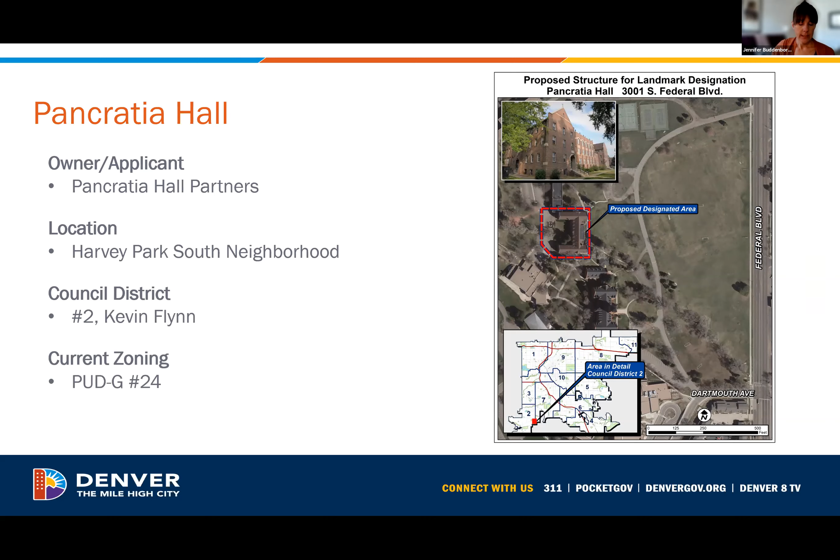The designation process is community driven, and applications can be submitted by a variety of persons that you can see here on the screen. For this property, the owner submitted the designation application. The applicant is owner Pancratia Hall Partners, represented here today by Jim Hartman, who will be giving the applicant presentation. Pancratia Hall is located in the Harvey Park South neighborhood and Council District number 2, which is Councilman Kevin Flynn. Its zoning is customized and resulted from the implementation of the Loretto Heights Small Area Plan. PUD-G number 24 includes guidance on the treatment of Pancratia Hall and the other historic structures and open spaces that are being preserved for future use. This structure is near the end of a rehabilitation that is providing an adaptive use of the structure as affordable housing. The project is a state and federal rehabilitation tax credit project.

A property must meet the following criteria for historic designation: it has to be more than 30 years old or of exceptional importance, meet at least 3 out of 10 significance criteria, maintain integrity, and be considered by the Landmark Preservation Commission for relation to historic context or theme. We'll go through all of those now.

This one meets a lot of significance criteria. The structure, built in 1930, is more than 30 years old. It meets 5 significance criteria, shown highlighted on screen, which is 50% of the significance criteria as a whole: B, C, D, F, and J. It has direct and substantial association with a recognized person or persons who had influence on society.

It embodies the distinctive visible characteristics of an architectural style or type. It is a significant example of the work of a recognized architect or master builder. It represents an established and familiar feature of the neighborhood, community, or contemporary city due to its prominent location or physical characteristics. And lastly, it is associated with social movements, institutions, or patterns of growth or change that contributed significantly to the culture of the neighborhood, community, city, state, or nation. I'll go through each of these significance criteria in detail now.

Pancratia Hall has direct and substantial association with the Sisters of Loretto and Mother Mary Pancratia, who looks a little scary here, but I understand from history she was a very lovely woman. She was born Mary Lucinda Bonfils in 1851, for whom the building was named in memoriam. Both the group and person had influence on Denver society as an arm of the Roman Catholic Church focused on education, in this case, women's education.

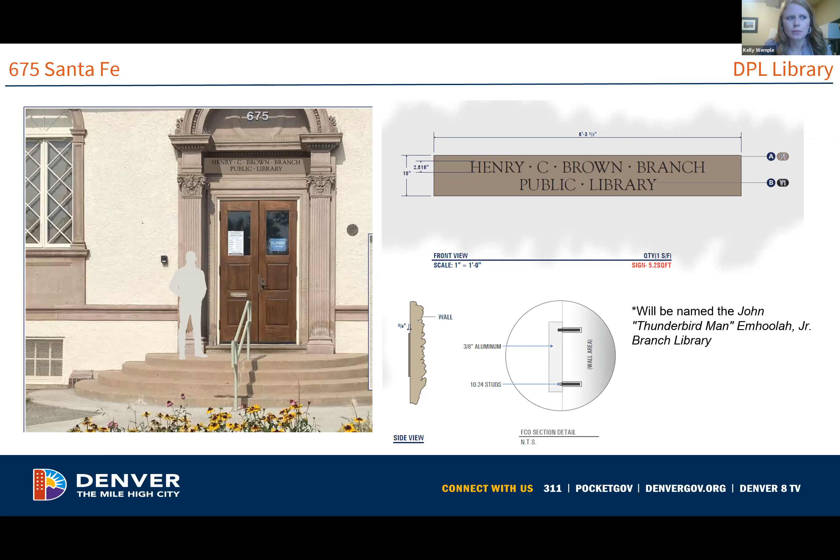So the next project up for design review is project number 2021-COA-461 at 164 Lafayette Street. Jesse, go ahead.

Hi, Jesse. Okay, can you hear me? Yes. All right, I don't know what happened because when I did my sound check earlier, everything worked fine. All right, let's get to it.

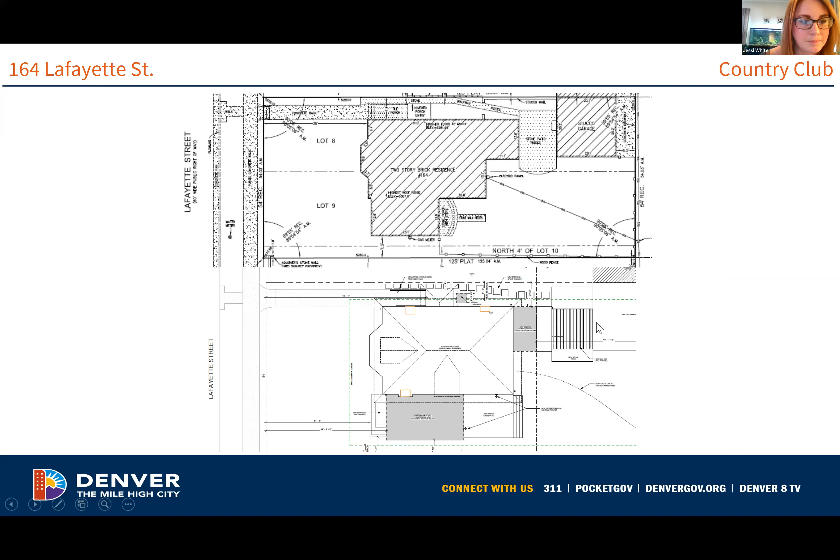So pictured here is the existing demolition plan and proposed basement level plan. Here you can see the proposal for an egress window on the front of the house on the non-historic side addition.

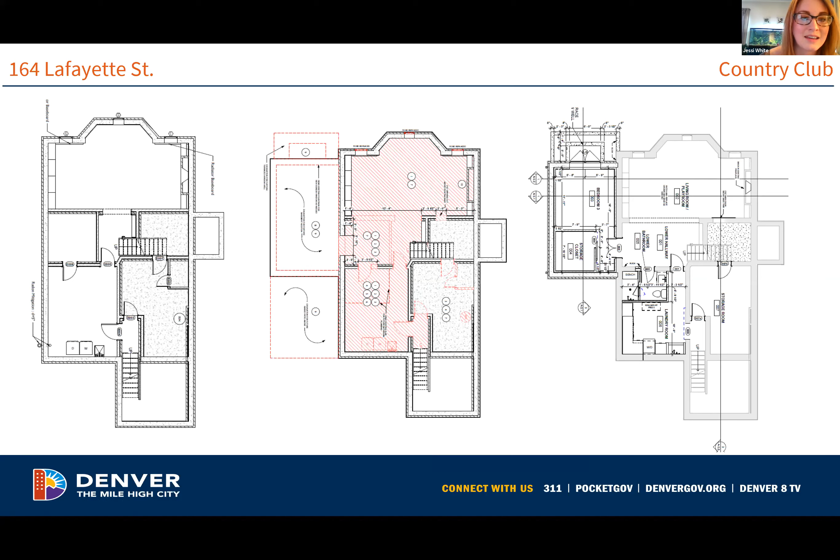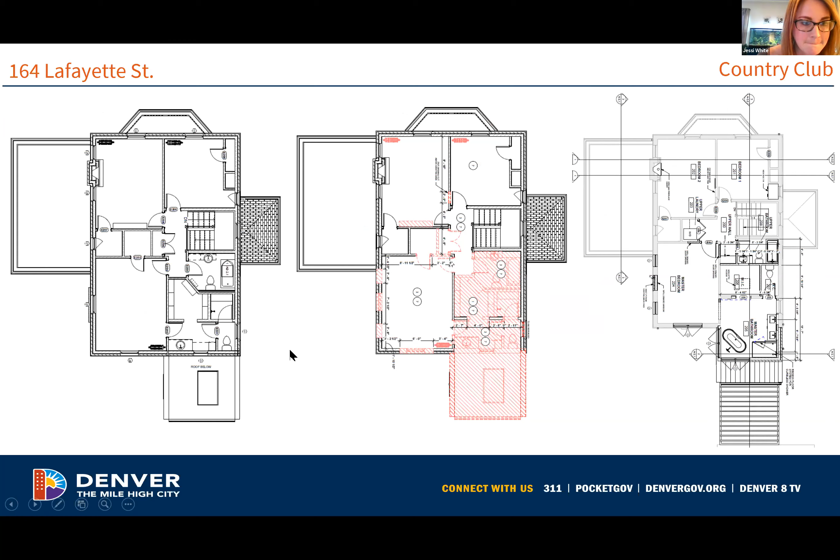Pictured here is the existing demolition and proposed plan for the main level. Give you a second to take a look at that. Moving on now, pictured here is the existing demolition and proposed upper level plan. And then finally, the existing demolition and proposed roof plan.

So in the demo plan, you can see where they're proposing to remove a rear dormer to accommodate the new rear addition. This is completely at the back of the house and would not be readily visible from public vantage points.

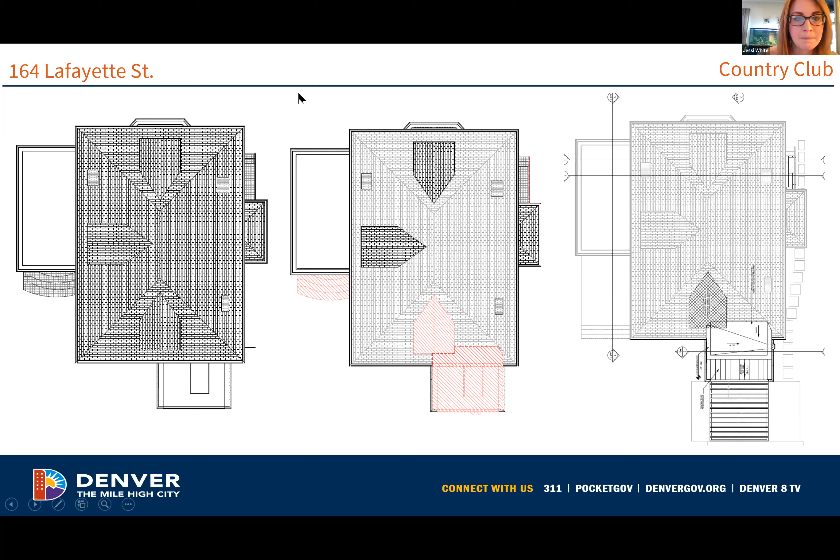Staff would like to note that the proposed egress window well will be terraced, which is atypical and makes the egress well quite large. The egress window and well will be mostly below grade and not readily visible from public vantage points, however. So if the commission is concerned with the oversized well, they may make a condition for the egress well to be a standard size. However, staff wasn't too concerned with the terracing, as it would not be as readily visible from public vantage points.

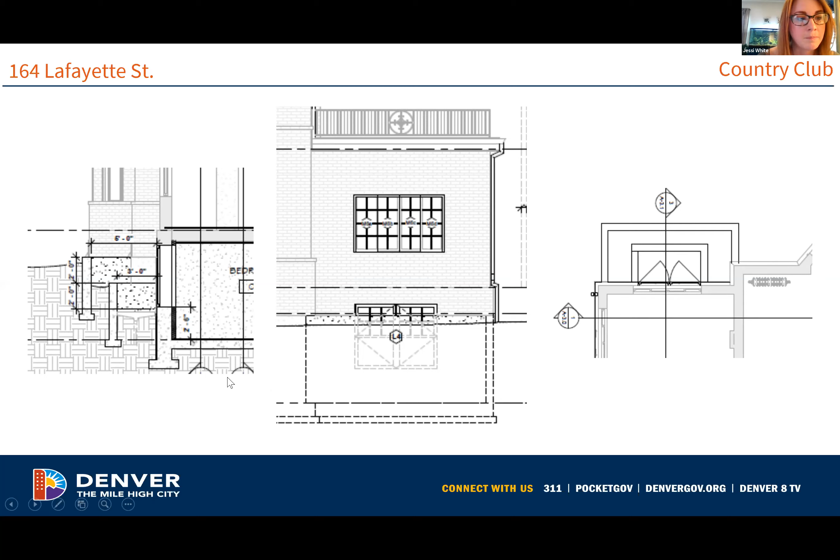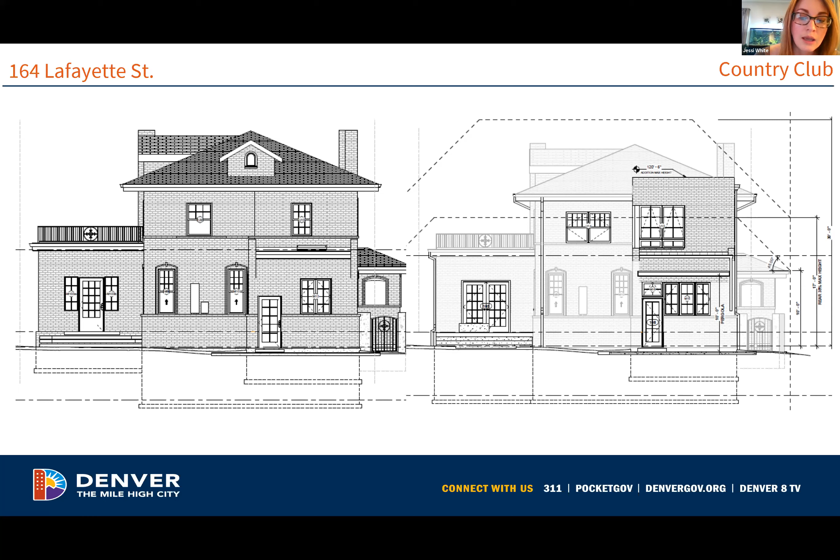The addition windows will be aluminum clad wood awning and casement style windows with a divided light pattern similar to the windows on the house. They aren't an exact match, but allow the addition to be identifiable as modern while still alluding to the divided light pattern on the rest of the house. The applicant will need to indicate in the drawings that the addition windows will be inset 2 inches in the wall per the commission's past requirements.

On top of that, the applicant is proposing to construct 2 new rear patios, installing stepping stones, all pictured here. The stepping stones will be behind the entryway shown in the picture on the left. They will add a raised patio measuring 15 feet 7 inches by 12 feet 8 1/2 inches, located on the northeast corner of the house behind the non-historic side addition. They will add another patio with a pergola, located on the northwest corner of the house behind the non-historic rear addition.

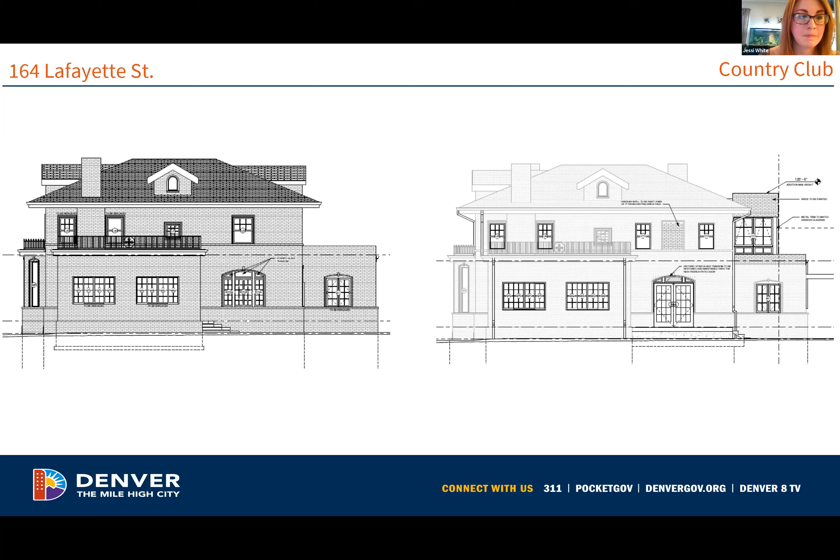So here's that historic casement window with the stained glass. Here is the historic stained glass transom window with the casements below. The applicant is proposing again to replace these casement windows with a set of French doors.

Staff felt that maybe some flexibility could be applied here, even though the lower portion is also historic. It is located behind that non-historic side addition and isn't readily visible from public vantage points. So staff felt we could provide some flexibility on the lower portion of the casement windows to convert them into French doors: one, because they won't be readily visible, and two, because the configuration will be similar to what is currently seen with those casement windows. Also, our other factor in thinking flexibility could be provided was that they are going to maintain that stained glass transom window over the top.

Finally, the applicant will be adding a new mechanical unit on the west side of the house behind the entry porch, and simple wall sconces will be added to the patio on the northeast side of the house. With the HVAC unit, staff felt that it was tucked behind that entry porch and would not be readily visible, so we are supportive of its placement there. Staff also was supportive of the exterior lights as they have a modern appearance and will be minimally visible from public vantage points.

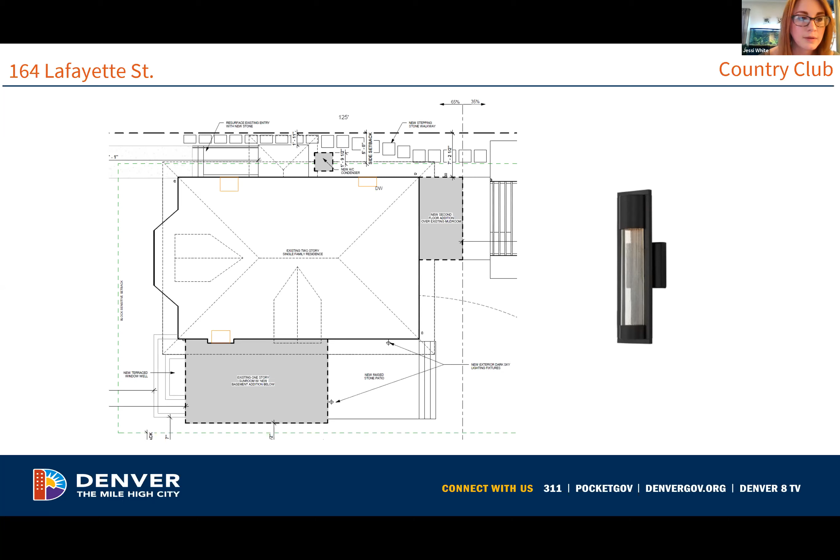Staff is recommending approval of the application, with the condition that the front door be maintained, that the front porch tile be maintained, that the addition windows be inset 2 inches, and that a spacer bar be added. So we're recommending conditional approval with those 4 conditions. If you need me to repeat them, I'm more than happy to do that. I believe I added guideline 2.20 for the porch condition.

Great. Well, thank you, Jessi. Any questions for staff? Yeah, Erica.

Yeah, you may not have the answers, Jessi, and I'm happy to ask the applicant, but do you have a sense of, with the railing at the entry porch, it's supposed to be lifted 3 inches, but I'm unclear how that's going to be achieved. Are they putting in new bases for it? I'm a little confused as to how that's supposed to be accomplished. And one other thing, I believe all the elevations are incorrectly labeled with wrong cardinal directions.

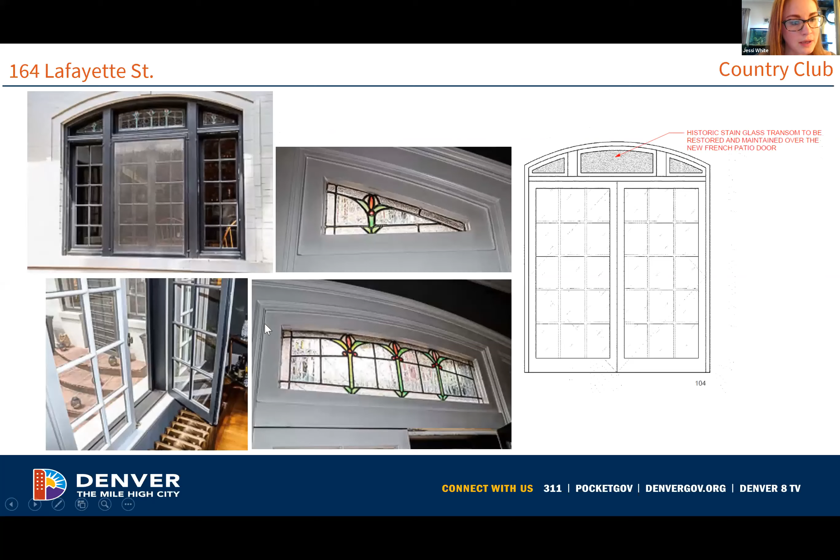So with the raised railing, let me try and zoom in on this, though I don't know if I can get it close enough. You can see in the drawings where they have it lifted, shifting it up 3 inches. There are some posts at the bottom that are kind of floating. My assumption was that they were going to attach it 3 inches higher where it meets the entry porch, but they can provide that additional detail if needed. Correcting the cardinal directions can also be added as an easy condition to this application.

Any other questions? Yeah, Ian. Hi, Jessi, I have a question. Do you know the approximate date of the addition? I do not.

All right, any other questions? No. Okay. I actually have one question, Kelly. Yeah, go ahead.

When you talk about replacing or repairing the existing door, what are your thoughts on the etching on the glass? Is that included in the repair? Do you think that is part of the original? I am of the opinion that the etched glass is not likely original. If they were to replace the glazing on that door, it would not require a permit and therefore would not require landmark review. So if they're wanting to get additional light into that area, they could easily remove that etched glass and put in a solid pane of glass, and it wouldn't even require our review.

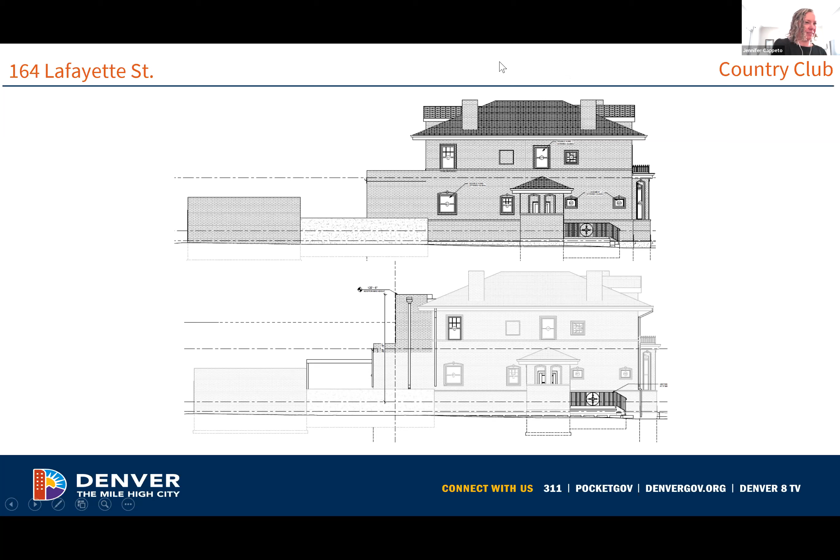All right, well thank you, Jessi, so much for your introduction. You actually covered half of the things I was going to talk about, so you helped me save a little bit of my time. As Jessi said, built in 1907, we believe this house is a traditional Denver square with a few eclectic revival details. It obviously has prairie style influence, but we also feel like it has a little bit of Italian Renaissance and classical influence as well. All right, next slide, please.

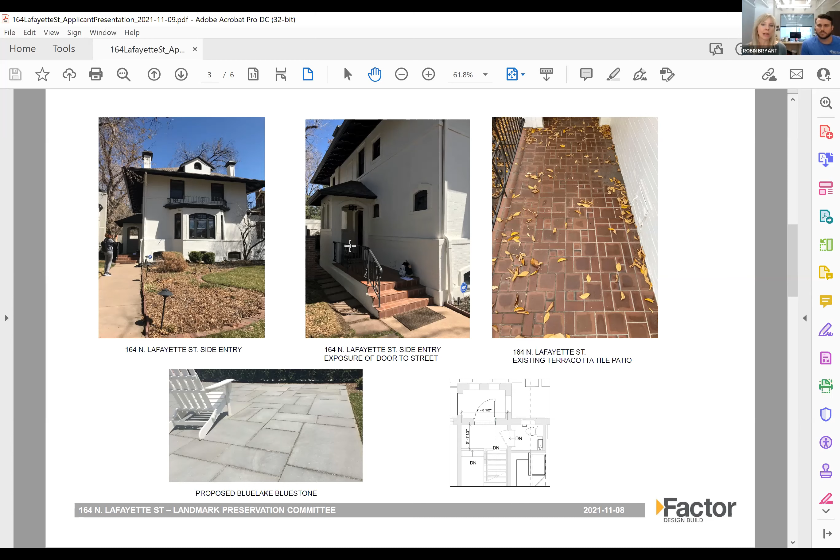One of the other things the homeowner would also be open to, knowing that bluestone is not an indigenous stone to this area, is looking at something like a Colorado buff or Colorado red sandstone in a larger ashlar pattern, if the commission finds it appropriate.

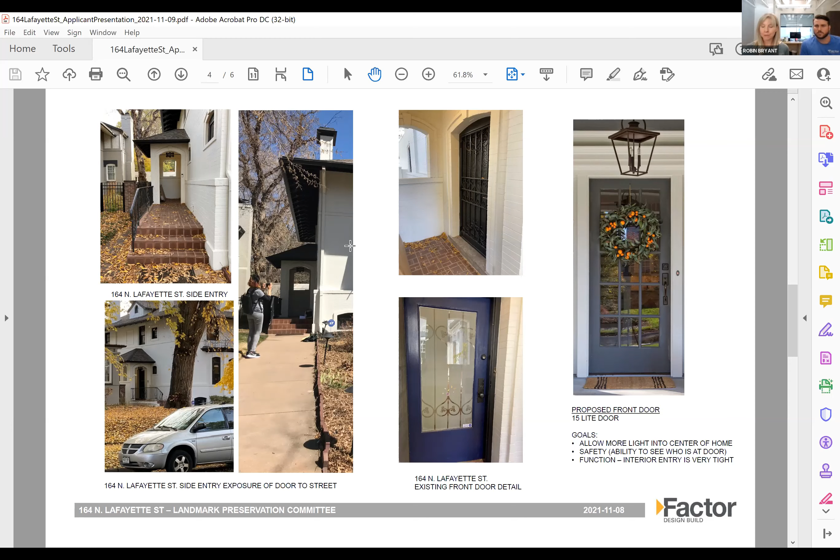Part of the reason we're proposing the change of the front door is that the homeowner would like to reverse the operation of the door to become an outswing door. If you look at the existing foyer entry, the foyer is actually on the landing of the internal staircase, so it's very narrow - only 3 feet 7 inches deep.

So that was the prompt to, one, change the door to an outswing, and two, modify the patio pavers, because if we changed the door to an outswing, the IRC would require us to raise the surface landing to only 1.5 inches below the door. That prompted the change to resurface the entry portico.

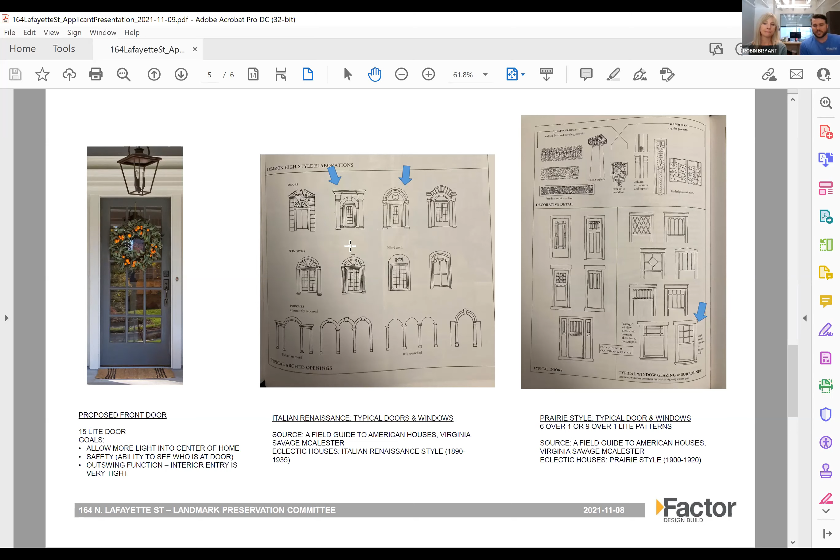Did you have anything else to add, Brian? I think the only other comment from the homeowner was her concern with having the stairs there and all the in-swing doors. She has two smaller children, so there's a bit of concern about the safety of those steps and everything around there with all those doors. That is it.

Great, thank you. Are there any questions for the applicants? Yeah, Graham. You're on mute. I even unclicked it, that's three times today. That's some kind of streak, isn't it?

The transom over the casement windows that are becoming a French door — I was curious whether those sash would be removed and if that whole frame was being reinstalled, or if that existing three-part casement window was being cut at the horizontal mullion. Just a little detail on how those new and old elements would interact with each other.

Yeah, so from my understanding we had the window evaluator come out to check if they're historic. I think three of the four separations of the stained glass are actually buckling and pushing the stained glass out into the room. So he recommended taking everything out when we do it, restoring the transom and putting that back in, then having the door go underneath with the framing at the top of the door acting as the support for that. Because somewhere there's pressure going on that's buckling the stained glass out into the room. So he was recommending taking it all out, restoring it, and then reinstalling it on top of the door.

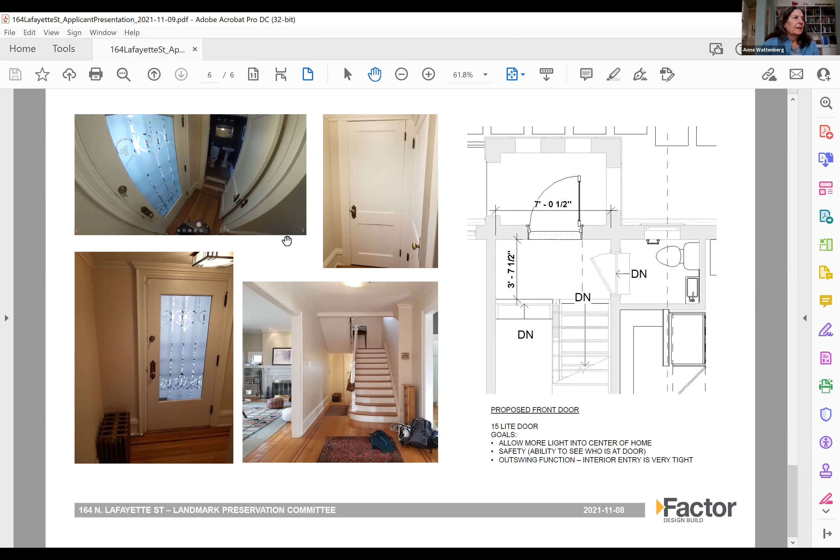I do. I'm looking at guideline 3.7, design the roof of a new addition to be compatible with the original structure and surrounding historic context. And I think this is something that we've been through before. I understand that this is at the back of the house, and often we give a great deal of leeway to that. However, I find this roof to be not compatible with the existing roof. How did everybody else feel about that? Any concerns with the addition roof? Does it bite into that prairie overhang. So it's a...

Kelly, I don't disagree with Anne that the addition itself, whether the first story addition, is contributing or historic—that second level, we heard about revival or classical detailing in the base Denver Square massing. I feel like the second floor addition has a bit of an international style to it, with strong glazing in the corner and a very square mass, which is unique but not one we talked about in the context of the rest of the historic character. So I see it being in the back and below the roof ridge as somewhat subordinate, but I don't disagree that a slightly different roof line might make that addition more subordinate.

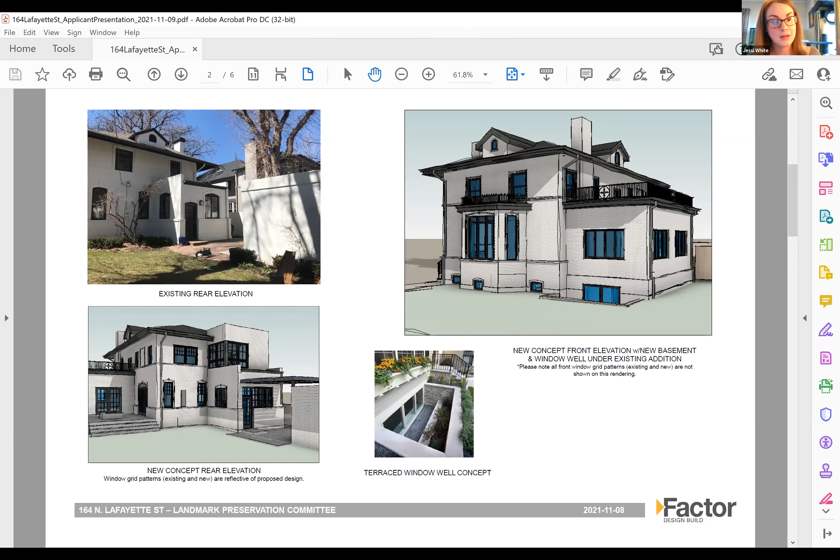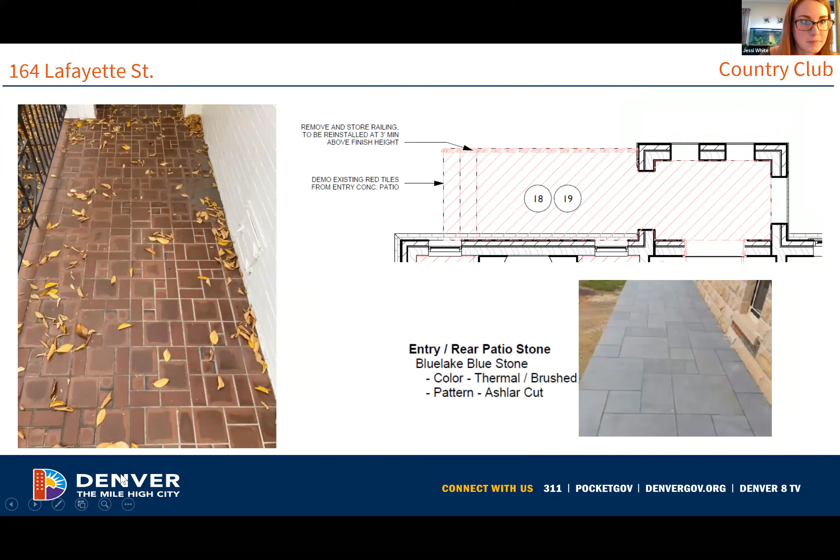Give me a second to scroll here. Seems to be lagging a little bit.

Okay, so here we have 1250 Vine Street, constructed in 1896. This is a contributing building to the Wyman Historic District. The applicant is proposing to replace 22 windows on the front, sides, and back of the house with aluminum clad wood windows. Staff would like to note that the applicant is proposing to make repairs to the existing porch on the front of the house. Just as a reminder, this does not require a landmark review. I'm just bringing it up simply because it is included in the application, and just wanted to put that reminder out there.

So here are the floor plans denoting the windows to be replaced and repaired. Teal represents the windows to be replaced. Most of the replacements are slated for the attic and second floor of the building, although the applicant is proposing to replace some windows on the back of the house at the first floor.

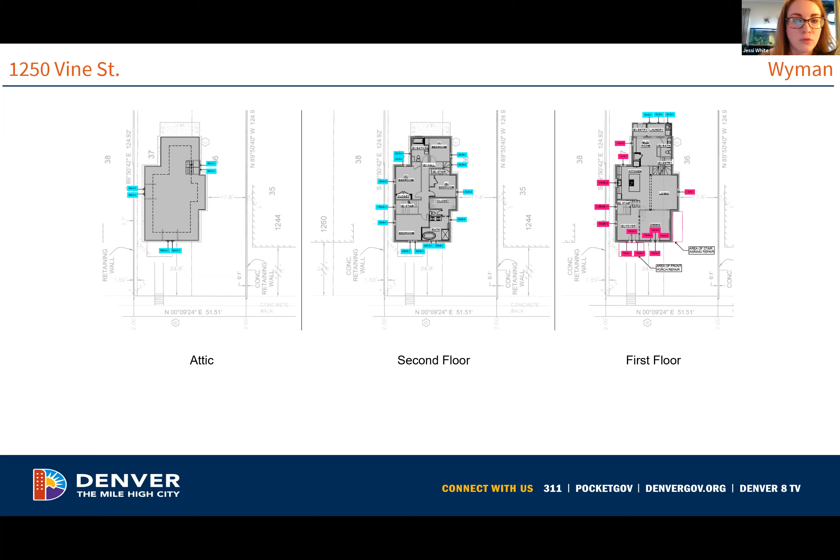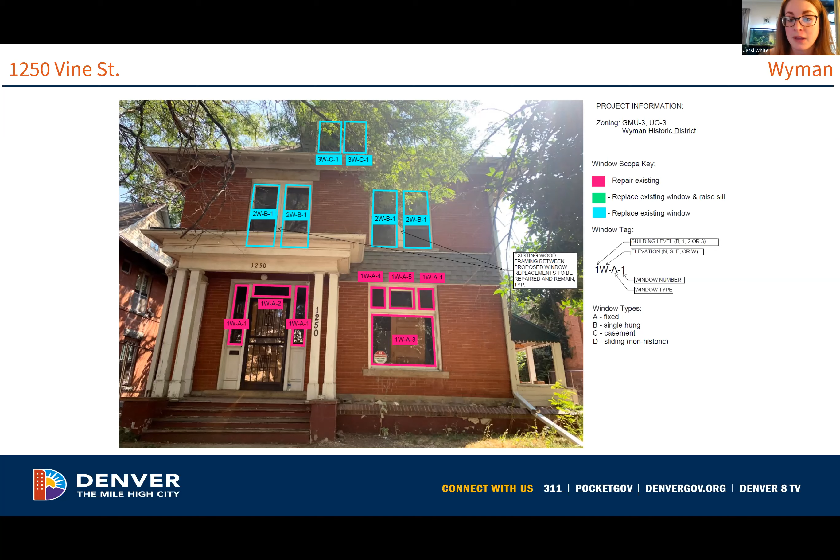So here's the west elevation. The applicant has broken their window labels down into the building level, elevation, window type, and window number. Staff would recommend that a specific window number be provided for each individual window, as there are several windows on each elevation that have the same label, and it just makes it difficult whenever you're looking at the detailed windows to remember which window is which. So on the west elevation, the applicant is proposing to replace a total of 6 windows.

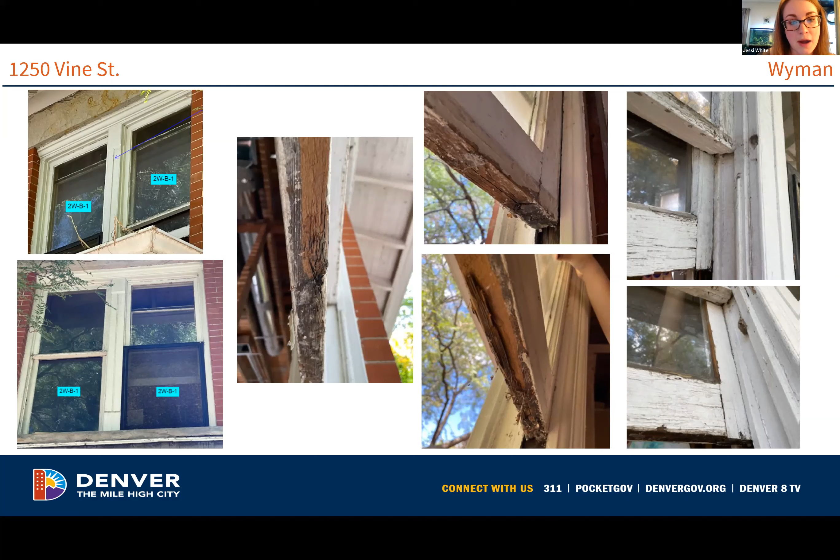Sorry, I have a cat that is in love with me right now. Generally speaking, the 4 windows labeled as 2W-B-1, staff recommend or are supportive of replacement of these windows. The images provided for each of these windows shows severe wood rot, splitting wood, especially at the lower rails, issues at the joints, especially at the lower rails. Again, here we need updated labels just so we know which window is which. But generally speaking, we felt that these windows were in a state of severe disrepair, as indicated by the photos provided for each of them.

The window labeled 3W-C-1 on page 10, pictured on the left here, shows wood rot, splitting wood, especially on the lower rail, and slipping at the joints. Staff would be supportive of replacement of this window. Window labeled 3W-C-1 on page 11, pictured on the right, shows details of the window trim and frame, but does not provide clear images of the condition of that window. So the applicant will need to provide us with additional information, photographs of the actual window to be replaced, so that we can make a clearer decision or determination as to whether or not it would be viable for replacement.

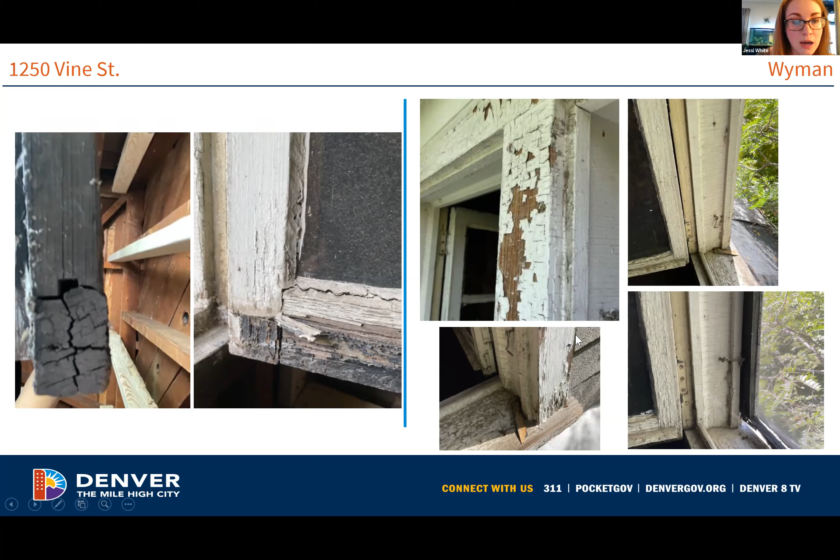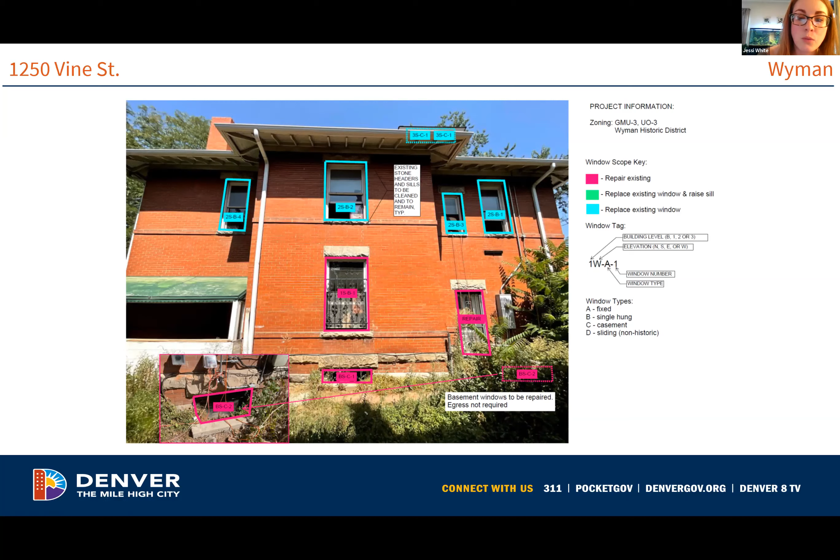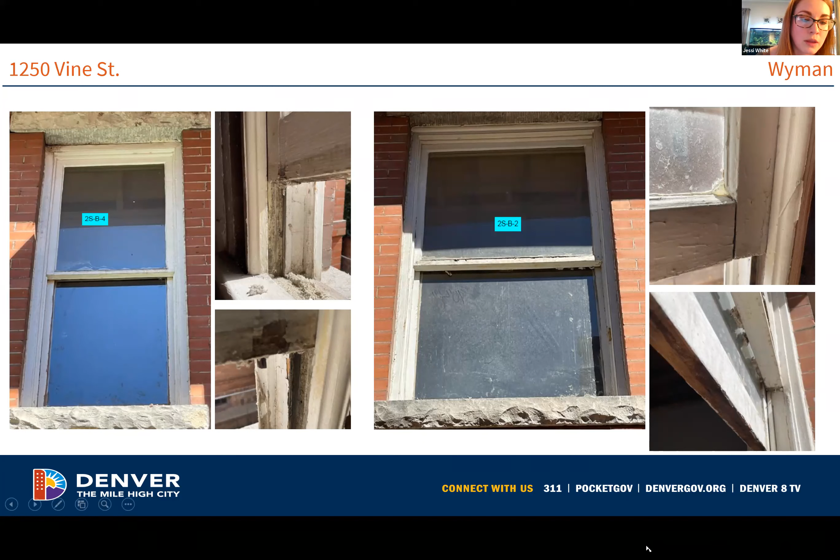So here's the south elevation. The applicant is proposing to replace 4 windows on the second floor and 2 windows at the attic floor level. Window 2S-B-4 is in good condition and could be easily repaired. Window 2S-B-2 is likewise and appears in repairable condition, with some slipping at the joints, but that again could be easily repaired. And there are some detailed photos showing the window condition. The wood looks sound and it looks like it could be easily repaired.

Oops, I'm on the wrong page.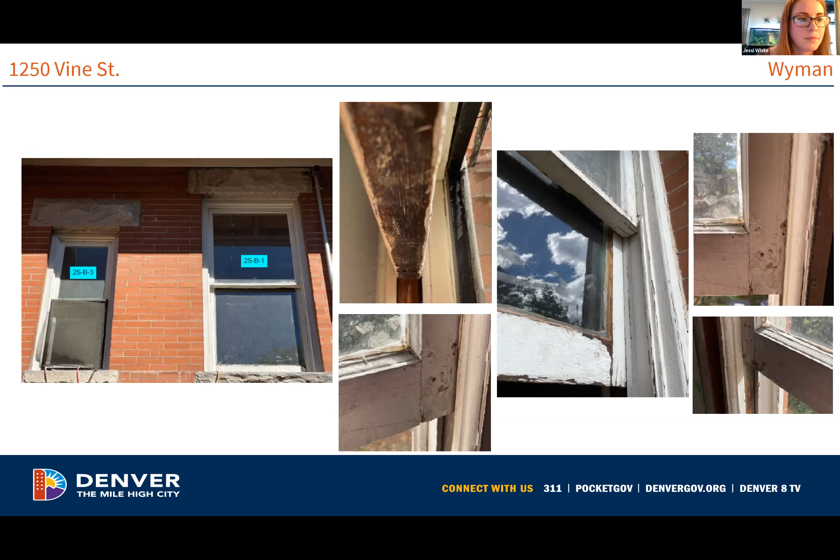Sorry, this mouse is real clicky.

This is the page showing both the double hung and casement style windows, so we're just needing some clarification and additional photos to show the window conditions more clearly. Also on this elevation, they're proposing to replace the roof on this non-historic awning, replacing the metal roof with a shingle roof in the color weatherwood.

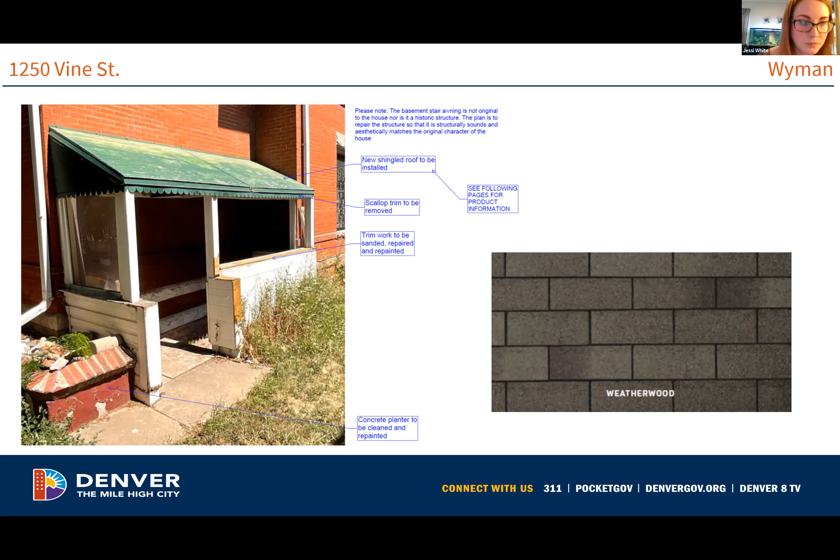Now we're going to move on to the northwest corner of the elevation. This was a tight side of the house, so they had to take it at angles. The applicant is proposing to replace two windows on the second floor and two windows at the attic floor level.

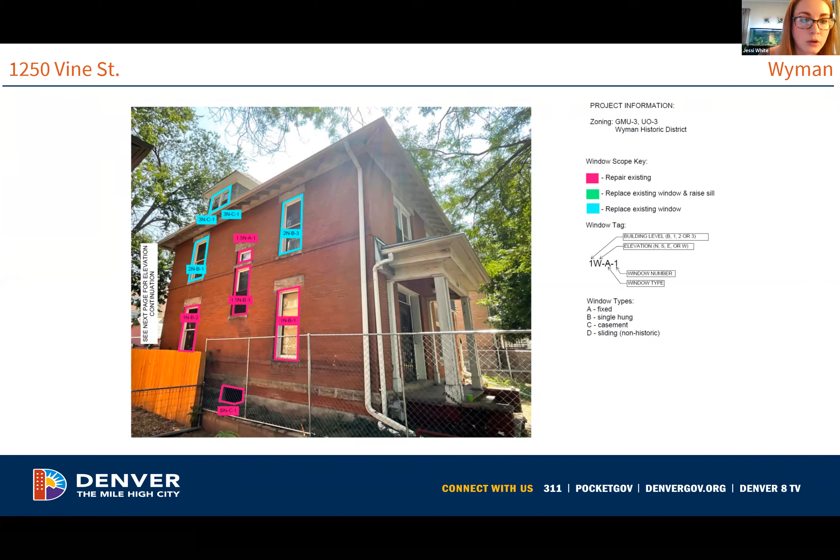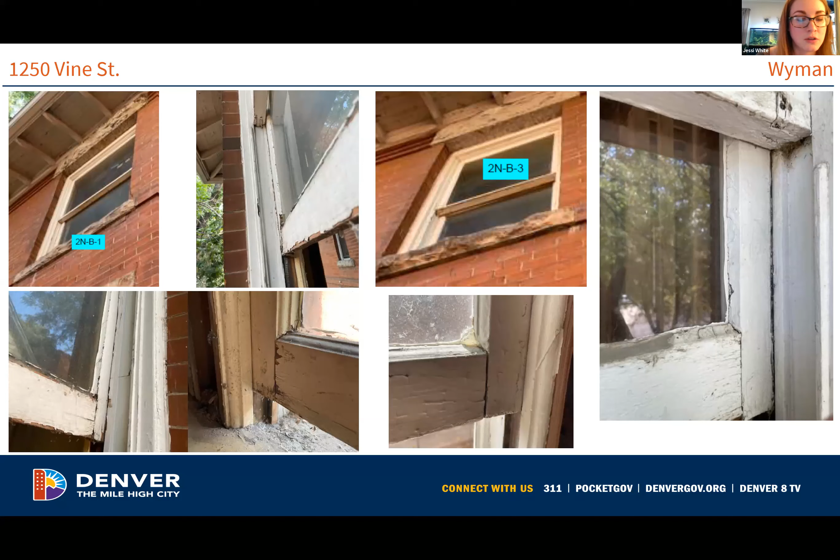Window 2N-B-1 is in sound and repairable condition. Window 2N-B-3 is in repairable condition with minor slipping at the joints. Again, those are all items that are easily repairable.

Windows 3N-C-1 are in moderately repairable condition. The wood appears mostly sound with damage to one of the stiles on the right casement window. The joints and glazing putty appear to be in bad condition, but could be easily repaired.

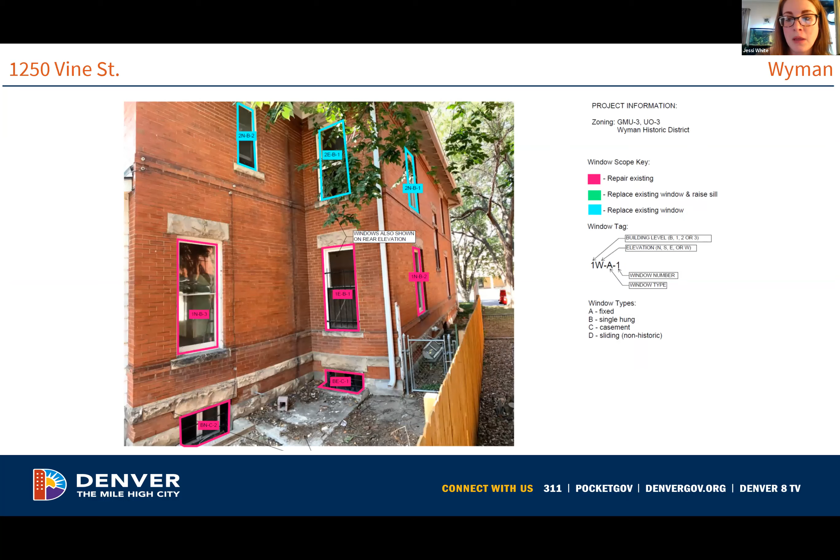Moving on to the northeast corner of that elevation, the applicant is proposing to replace two windows at the second floor.

Pictured here is window 2N-B-2. This window appears to be in sound condition, but may potentially be non-historic. The applicant will need to provide clearer images to make a final determination. It does look like the glazing has been replaced, but that doesn't necessarily mean the window is no longer historic. We don't have clear images showing the overall window, both window sashes, or the hardware to determine whether it's historic.

Finally, we'll cover the east elevation. The applicant is proposing to replace three windows at the ground floor level and one window on the second floor level.

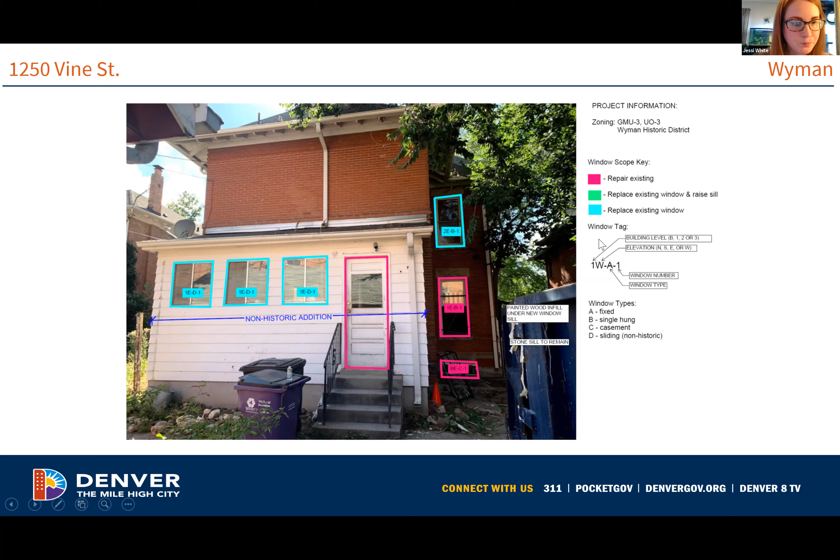Window 2E-B-1 shows signs of joint issues at the meeting rail and lower rail. Glazing putty is significantly damaged. The upper sash appears to be out of plumb. Staff would be supportive of replacement of this window.

The applicant did not provide detailed images of the three windows at the first floor, all labeled as 1E-D-1. The windows appear to be non-historic, but additional detail images would need to be provided for us to make a clear assessment, though we feel those could potentially be replaced. Landmark staff feels this application has not included sufficient information on the windows to be replaced.

Staff is recommending denial of the application, citing guidelines 2.16, 2.19, and 2.20, with comments on additional information needed that have been cited throughout this presentation and in the staff report.

Thanks, Jessi. Are there any questions for staff?

Question, just so we can have a constructive conversation: why is this coming to the commission since it seems to be an incomplete application?

We brought it initially and checked for completeness items, and it did appear to have the completeness items checked off. Once staff got into writing the staff report, we began to see details missing or incorrect that you can't catch at first glance. The completeness items are that they provide a window assessment, which they did include, site plans labeling window locations, which they did, and detailed photographs of the windows, which they did. It wasn't until we got into the staff report phase, really digging into it, that we noticed all these little inconsistencies that couldn't have been caught until we got down deep into writing the report. Unfortunately, that happens on occasion.

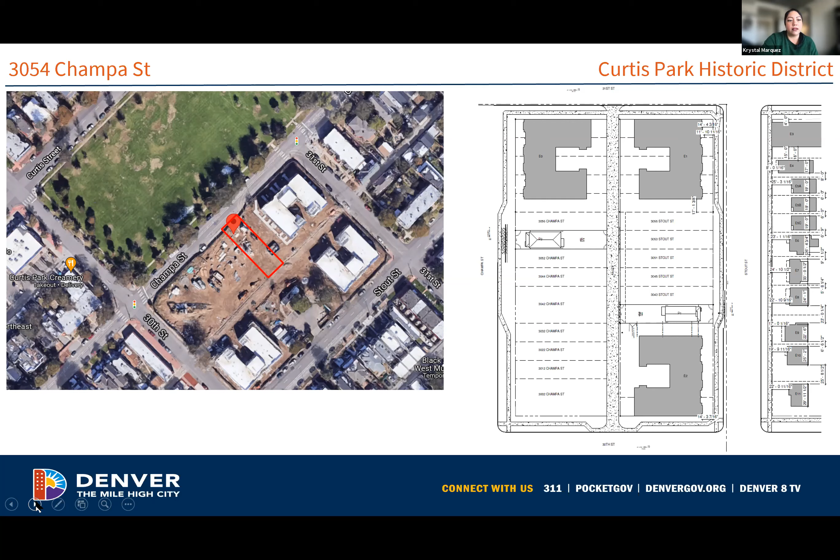So here you can see some existing photos of the vacant lot. They're a little small, but it's a vacant lot. Below is the site plan. As you can see, there is a 20-foot setback that matches those adjacent properties that have been approved. The applicant will also be installing a horizontal wood fence, 6 feet tall, at the rear yard, and the rear yard will have a parking surface instead of a garage like some other ones we've had.

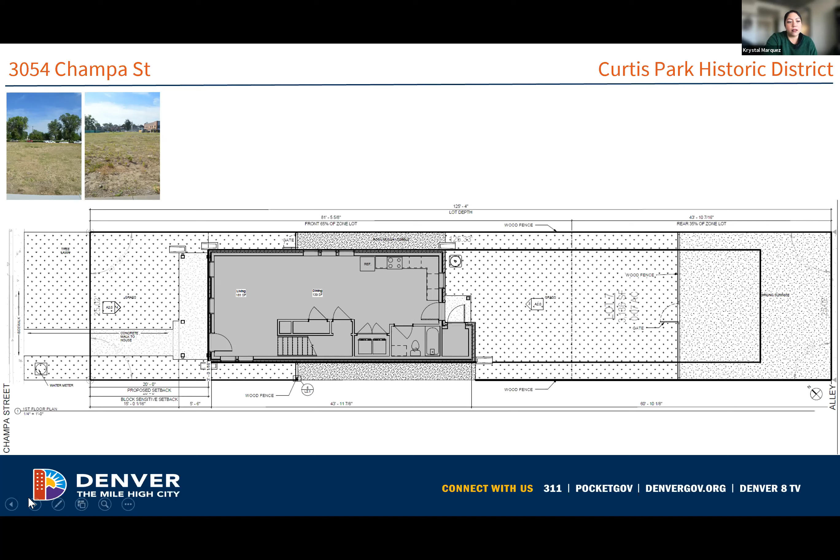Here's an overview of the proposed materials for the structure. The entirety of the home will be clad in General Shale's smooth brick in the colonial satin color, which is common in the district. The windows will be a Pella fiberglass single hung in black. All the windows on the house will have lintels and sills using precast concrete in gray, and the roofing will be a traditional asphalt shingle. All the fascia and trim siding between the windows will use the LP SmartSide smooth finish.

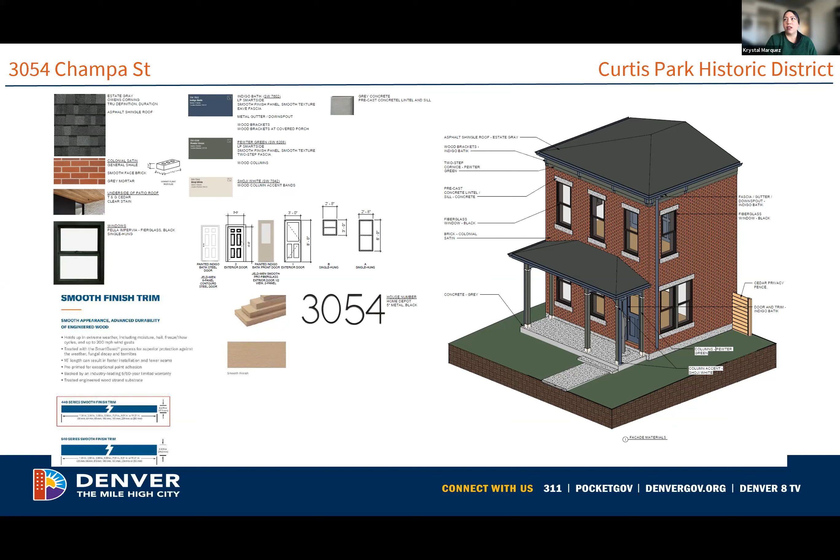So here you can see the front facade of the new infill. It uses that Italianate window pattern that's typical in the district and has those 1/1 windows at window sizes common to the district, as well as a hipped roof common to this form within the historic district. As you can see, it has the lintels and sills with that precast concrete in gray. The new structure will have a simple porch with light detailing to differentiate it as new construction. The details for that and the new fence and the lintels are to the left on our screen.

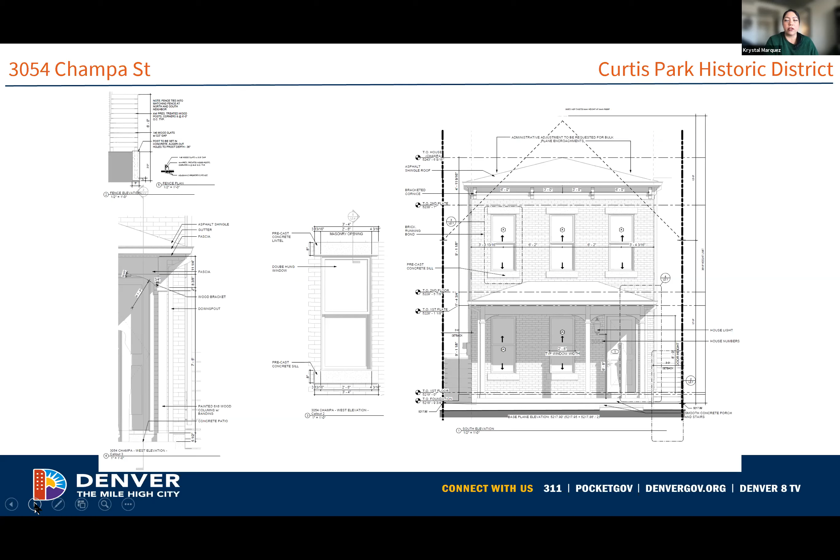Here you can see the west elevation of the structure showing that brick cladding wrapping the entirety of the structure. Window proportions again and materials are characteristic of the district. The top cornice will have decorative brackets that wrap around just to the sides of the structure, but do not continue all the way back. Again, you can see there's a wood trim proposed between the ribbon windows at the first floor that'll have a smooth texture.

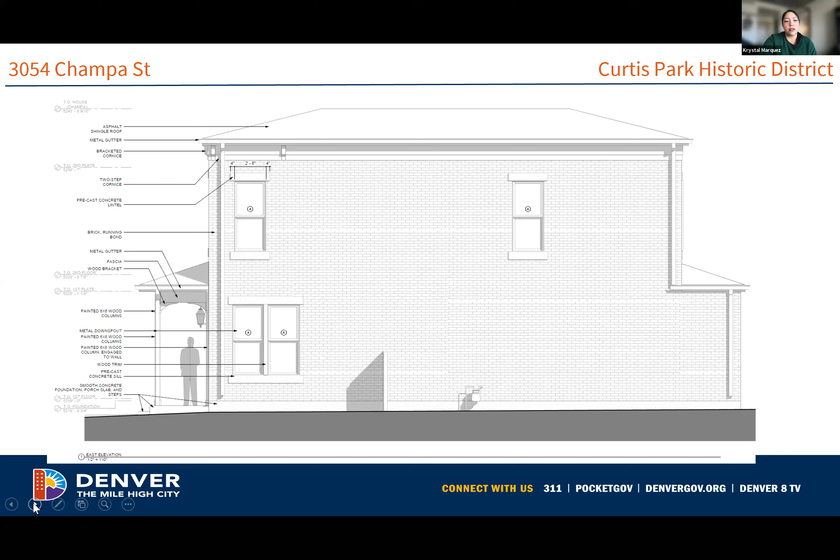Similar to the other side, this is the east elevation with the same materials and wrapped brackets at the cornice. And then here is the rear elevation. It just has that small, simple one-story porch on the back, with the single hung fiberglass windows and brick siding. You can see some eave details at the left and the bracket details.

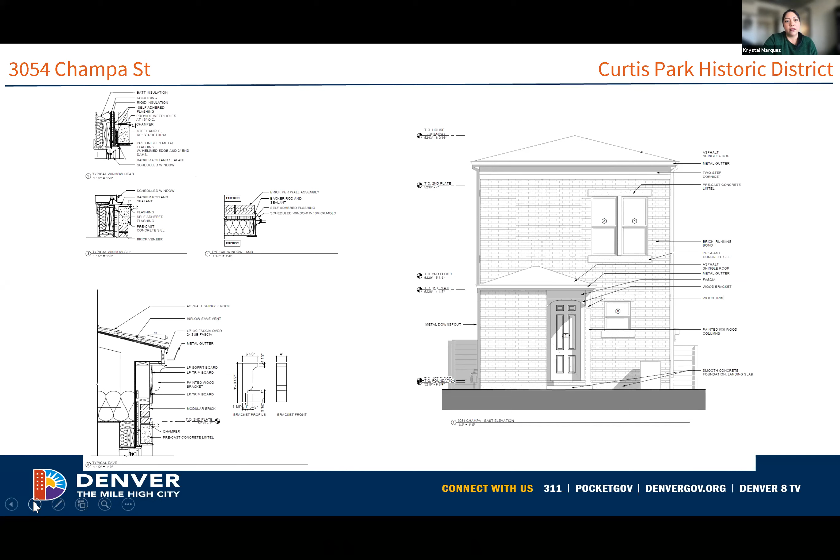Here are the isometric views of the proposed structure. The structure's design details on this hip roof, two-story Italianate unit with a one-story porch are characteristic of the district and match historic proportions. Staff did notice after the application was posted that the applicant did not include the manufacturer specifications for the light fixture next to the door, so staff is recommending approval with a condition that the applicant provide a manufacturer specification for the proposed light fixture. And that's it, thank you.

Any questions for staff? All right, great, let's have the applicant join us. And when you're promoted, you'll just be able to unmute yourself and start with your name and address for the record.

Hi, this is Anthony Reese, AIA. My address is 215 South Wadsworth Boulevard, number 300, Lakewood, Colorado.

Thank you. Krystal has a good overview of the project. This is one of 2 homes for Habitat for Humanity in the neighborhood, so we tried to keep it with a simple yet attractive Italianate style, matching the neighborhood. The only thing I would add is we are showing a horizontal fence, between 2 other homes, so this fencing style will match and tie in with the fence previously approved on the home at 3052 Champa and 3056 Champa. So I can answer any questions you may have.

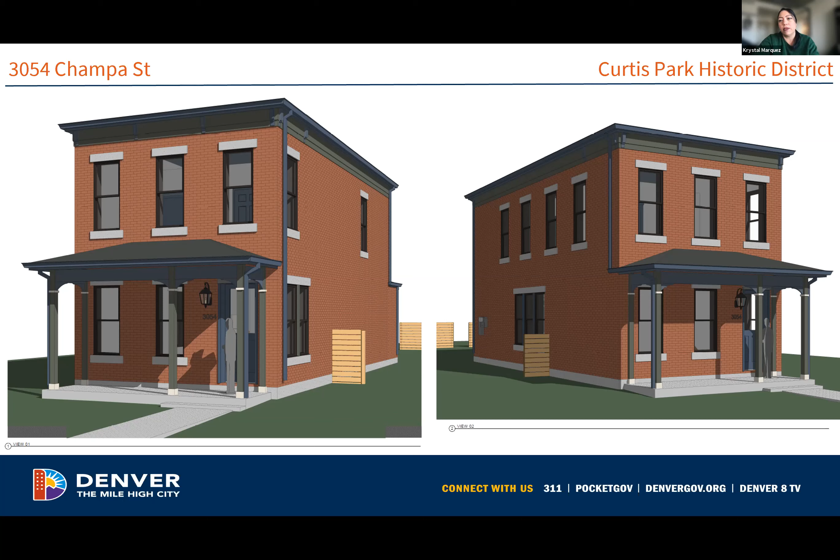Krystal, could you clarify if the horizontal fence was approved on the adjacent properties? I'm not positive on that. Those were Abby's projects. I will say though that typically on interior lots where there's going to be minimal visibility, we're not opposed to horizontal fencing. We do allow it in some circumstances. We're mostly more strict about it on corners and when it's going to be a large expanse of it. So, all right, thank you.

Let's move into deliberation. What was everybody's thoughts on this? I really love these Habitat houses, I think they're just great. I have a question - I understand the need for more complete information on the lighting fixture on the front door. Is that something that would be an administrative approval, or would that be something you have to add a condition for? Okay, that's mostly what I wanted to know. Otherwise, this is more of the same. What's not to like.

Yeah, great, I agree. I think this is really consistent with the neighborhood. We already reviewed the mass, form and context, and I think the details follow through with the intent that was approved in phase one. I think it's going to be a project that really fits well in the district.

Yeah, Anne, I'm in agreement. Oh great, go ahead, Anne. I was just going to chime in and say I'm in agreement. I think that this meets all the guidelines. It does a really nice job, and it's nice to see the building turn the corner and keep that materiality going all the way around. So I think it's going to be a successful addition.

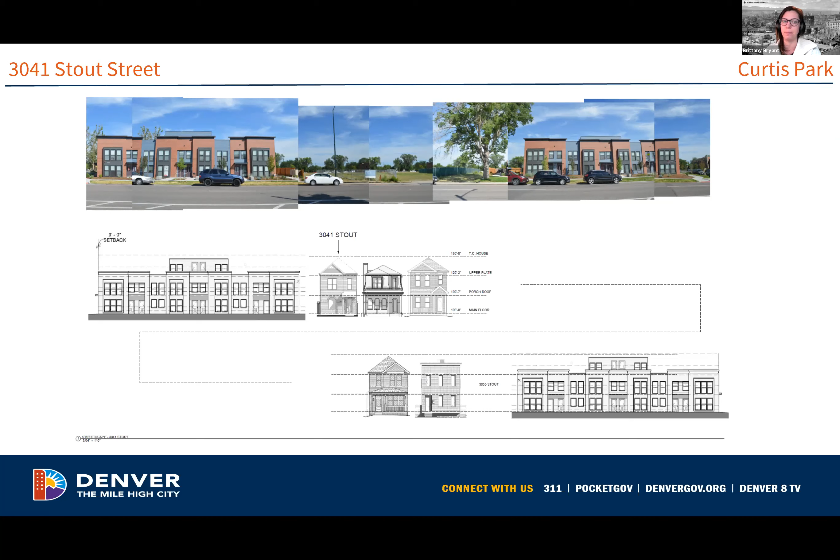So this is just how that will relate to the block context. The proposal is just for a single family residence. There will be a fence installed in the rear yard. Unlike the previous submittal, this is a vertical fence, so I don't have any concerns over the fence as it is vertical and that is allowed by our design guidelines.

There will be a new concrete walkway up to the front door, and the porch foundation does extend all the way across the facade. However, the porch itself is just a partial width porch, so the roof of the porch doesn't extend all the way across the facade.

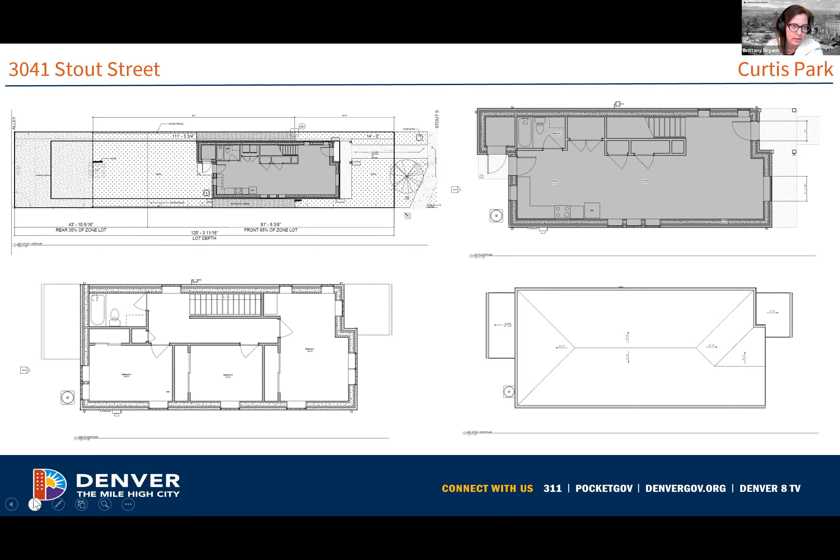This proposed structure is influenced by the Queen Anne development within the district. It will have a concrete block foundation and the building is entirely clad in brick, with a scalloped and diamond shingle detail in the gable face. Brick soldier courses and stacked bond courses, and a dogtooth course, will break up the building massing and provide horizontal banding across the building facade.

Windows on this structure will be double hung 1/1 windows on the front facade and single hung windows on the secondary elevations. All windows are fiberglass composite. Here you can see that the front will also have an arched window. This is a picture window, so that arched window will not be operable. And here you can also see that partial width porch that is proposed as well.

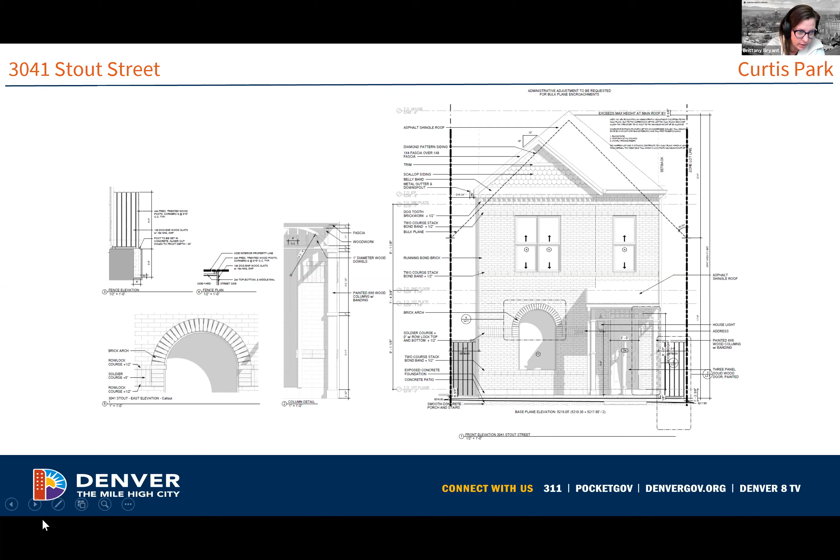In terms of the building elevations, I do not have major concerns. It hasn't varied in design at all from the phase 1 submittal, and that brick banding detail is wrapping the facade.

However, I would like to note that at the rear, 6-panel doors are proposed. These are not common within the Curtis Park Historic District. However, they aren't visible from the public right of way, so staff aren't very concerned about these doors, even though they're a little atypical.

The front door is a half light door with panels below. Here you can see some of the banding details and how they will articulate the brick banding. The mechanical unit will be placed at the rear of the structure, tucked securely behind it.

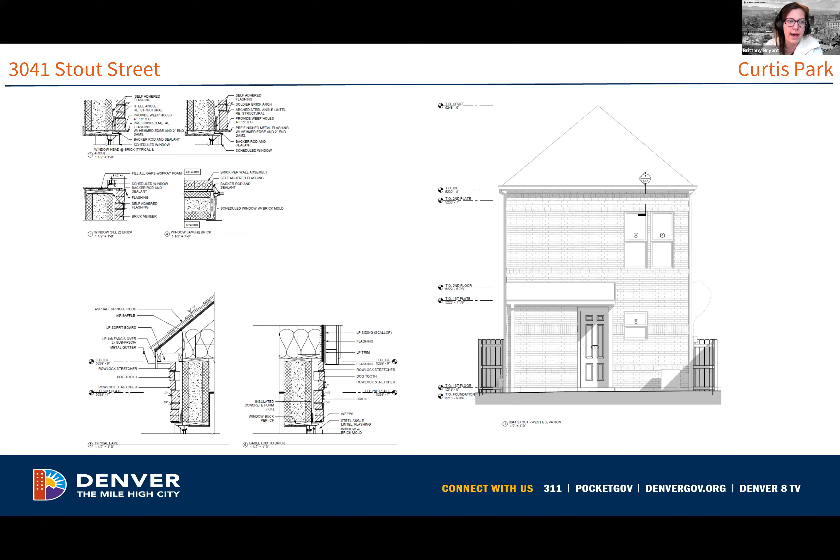On the north elevation you'll have the gas meter, and on the south elevation you'll have the electrical hookups. However, no other venting or building penetrations are shown in the building plans, and those will need to be shown, as they're something we do have purview over. So I am asking that those be added to the elevations and that all those penetrations be kept to the secondary elevations and not through the front facade. Again, here you can see the electrical, but no building penetration is shown on the facade.

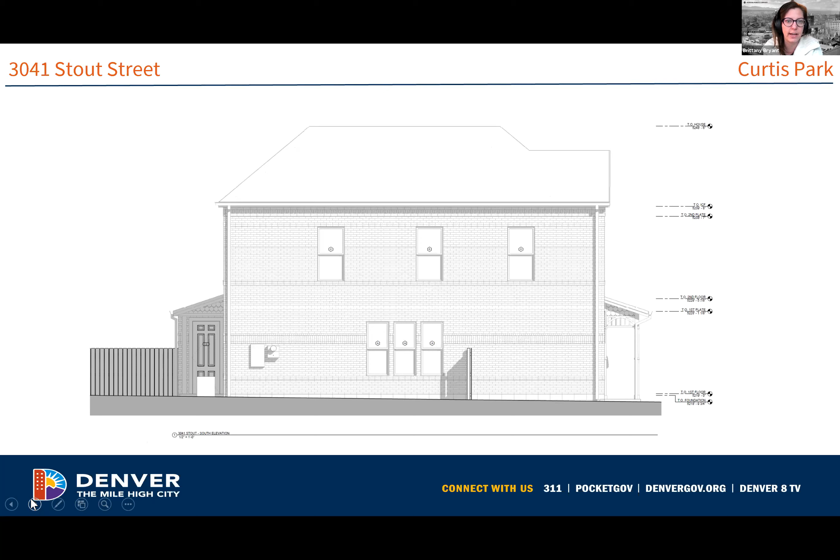In terms of the design details, this is a very simple project. The brick will be summit brick in medium red, typical of the Curtis Park Historic District. It will have a split face concrete block foundation, which is a little atypical, as we typically require a smooth finish concrete. However, I feel this split brick foundation will identify the structure as new, and it's minimally visible from the public right of way, so while atypical, it's contextual and appropriate for this structure.

The shingling material will be LP Smart Side scallop shingle, with a diamond and scallop shingle pattern to help break up some of the detailing in that gable face. Pattern shingles are typical of the Curtis Park Historic District; however, you don't typically see this particular patterning in the way the applicant is laying it out, so we feel this also helps distinguish the structure as new.

The porch ceiling will be tongue and groove with a clear cedar stain, and the porch columns are 6x6 wood columns, painted. Staff did initially have concerns over the detailing of the porch, feeling it might be too ornate. However, looking at contextual studies, it's a simplified version of those more ornate porches with spindles and decorative columns. So while a little more decorative than typical, there are small differentiations that help distinguish it as new and not a replica of the existing.

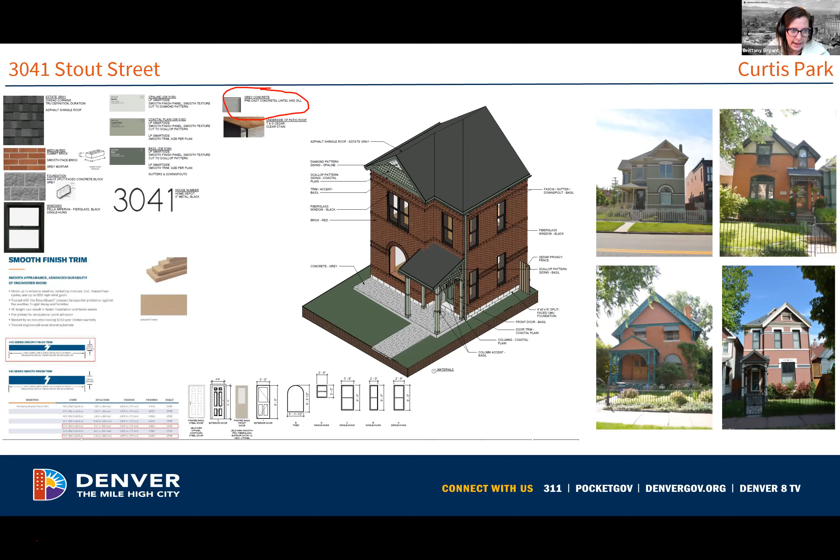I also need the manufacturer specification for the light fixture. The applicant did provide that to me, but a day before the application materials needed to be distributed to the commission, so I haven't included it in your packet. However, the fixture is appropriate for this district with no uplighting, so it is acceptable, but I still have that as a condition since it wasn't provided to the commission previously. I will go back to an isometric of this project.

I am recommending conditional approval with a condition that the precast concrete lintel and sill material sample provided on page L2.5 be eliminated from this packet, as it doesn't relate to this specific structure. All venting and building penetrations should be shown in plan, and a manufacturer specification should be provided for the proposed light fixture located adjacent to the front door.

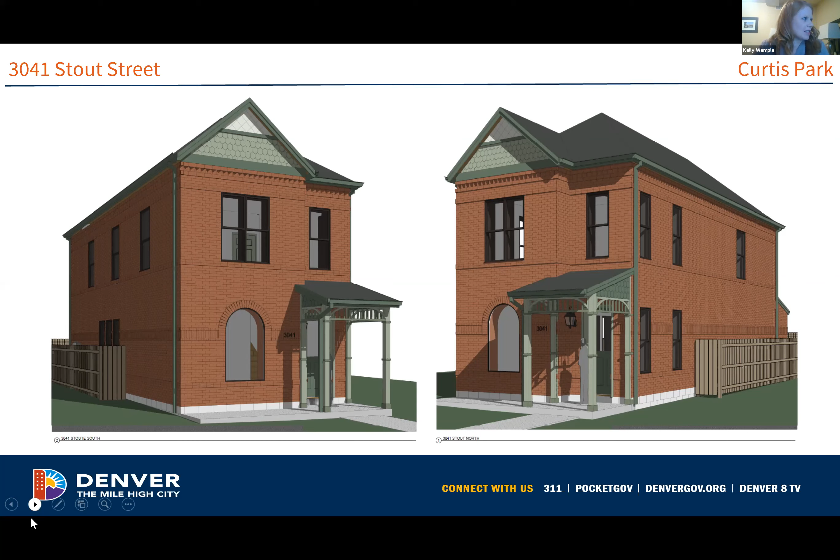So excited to see what these look like. Gonna be great projects. All right, our last project on design review today is...

2021-COA-482 at 900 Oneida Street. I hope I pronounced that right. I always get it wrong. That's what I say, Kelly. Okay, good.

So our next project is for a pop top addition at 900 Oneida Street within the Montclair Historic District. The commission previously reviewed this request on September 21st and chose to deny the pop top addition. However, the commission did indicate that a pop top at this structure would be possible, they just needed some minor adjustments. This is a 1946 structure, non-contributing to the Montclair Historic District since the period of significance is prior to and including 1940. It's located on a corner lot across from a park.

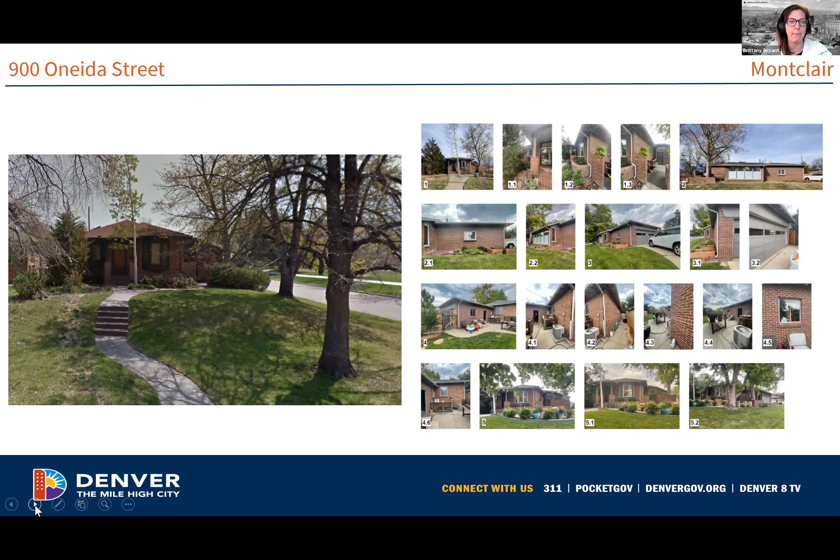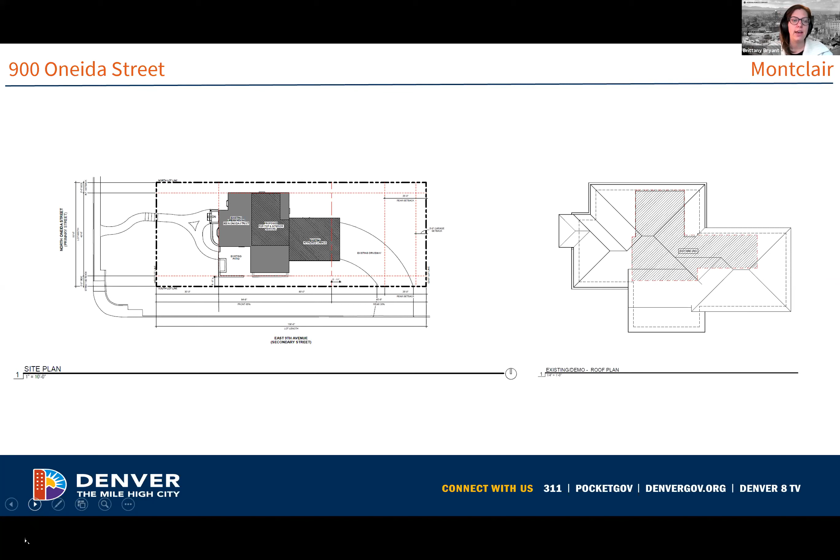Here you can see the placement of the pop top relative to the existing roof and the amount of demolition required to accommodate that pop top addition, and here's just that roof demolition. There is some demolition proposed for the actual building facade to accommodate different sized windows on the secondary elevations, but staff don't have concerns over those modifications.

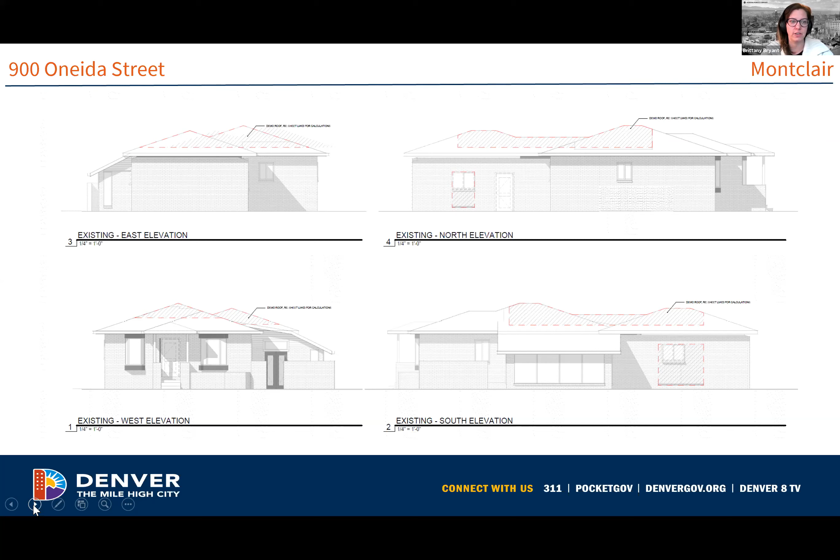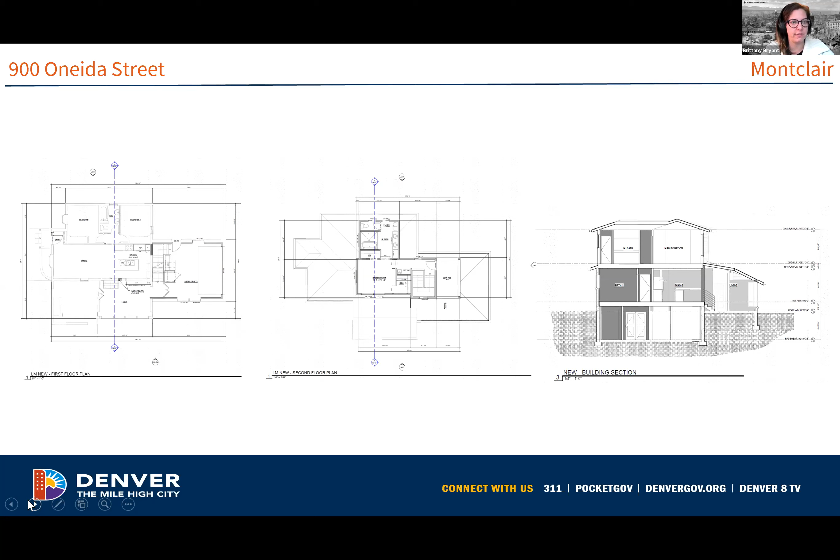And here we have the revised pop-top addition. Since the September 21st meeting, the applicant reduced the size and scale of the rear two-story balcony from a wraparound porch to a smaller 92 square foot balcony oriented totally to the rear yard, restudied the number of window types and proportions, and restudied the roof profile of the pop-top addition to relate more to the roof profile of the existing structure and break up the roof ridge line along the west elevation.

Instead of the vertical siding that was previously proposed, the applicant is now proposing a horizontal shiplap siding, which is intended to relate to the minimal traditional mid-century character of this building.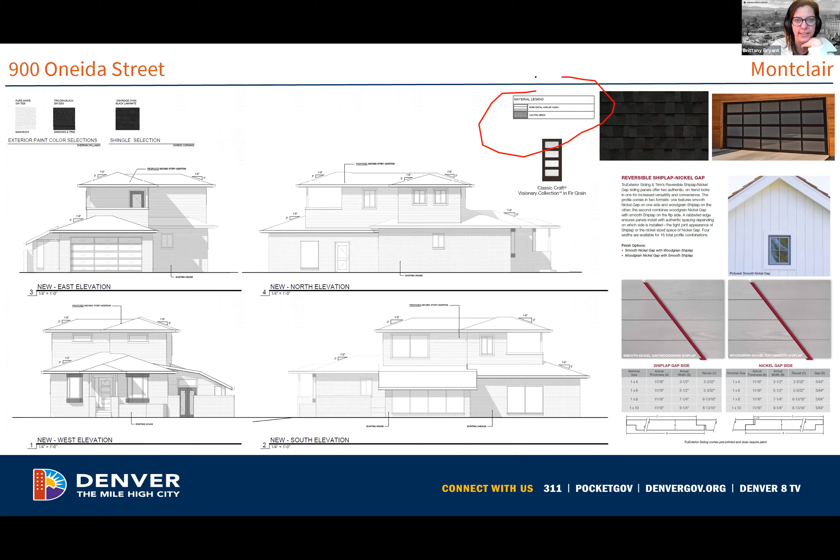I do know what all these materials are; however, if you look at the plans, and I have manufacturer specs on all of the materials, the only materials specifically called out are the roofing material and the siding material. For ease of permit review, the material legend should include all of those materials clearly listed out, as the building department doesn't take those material specs, and this ensures it matches the landmark approval. I'll go back to the isometric I was showing, and that's all I have.

Great, thank you. Any questions for Brittany?

Nope. All right, let's have the applicant join us.

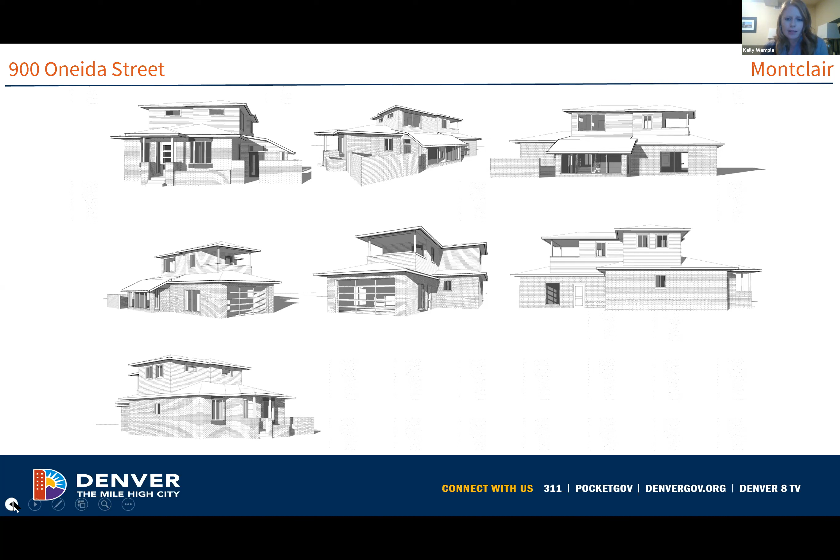Yeah, this is Erica, sorry if you hear the dog, he's upset about something. But I wanted to say I do think it meets all the concerns we had raised in our meeting. I don't think it was brought up by the applicant or Brittany this time, but I do think the reconfiguration of the roof from gable on hip to just hip is also more successful and compatible with the existing house. So I support the overall changes in this application generally.

Great, thanks Erica. Anne, were you going to mention something too? Yes, I agree with Erica, and I really wanted to commend the applicant because last time we saw this, there were so many things that didn't make the addition subordinate to the existing house underneath it. I think the applicant's done a terrific job of lining everything up, and it does a good job of meeting the guidelines. It's just a great project. I'm in support of the staff's recommendations.

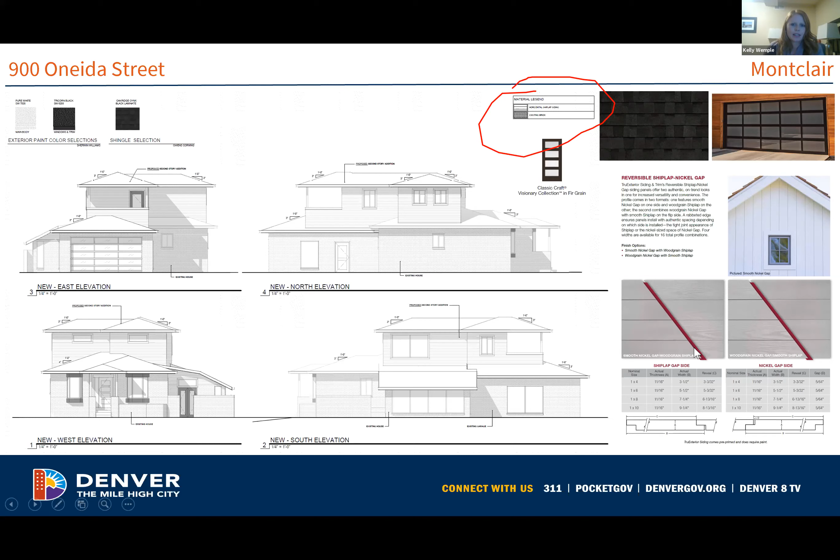George? Aye. Brad? Aye. Aaron? Aye. Graham? Aye. Julie? Aye. Gary? Aye. Erica? Aye. Anne? Aye. And Kelly? Aye. All right, another unanimous vote. So the motion passes and the project is conditionally approved.

So that concludes our design review projects today. We do have a business item on the agenda up for discussion, and that is the proposed meeting dates for 2022. That is correct. All right, so if the public wants to comment, they can. There's a public comment period for business items, just putting that out there.

Emily and I put together the proposed meeting calendar. She was in a training today, so she's not here. That's why Crystal's been helping out. Thank you, Crystal.

What we are proposing is the typical first and third Tuesday schedule that is in our ordinance, but we were recommending a shift in a few of the dates. For January, shift from the first and third to the second and fourth Tuesdays due to the first Tuesday's proximity to the New Year's holiday. My calendar doesn't go that far, so I think the 4th would be the first Tuesday, and if we shift it, it would be the 11th and the 25th instead of the 4th and the 18th.

Similarly for December, the first and third Tuesdays would be December 6th and 20th. We were suggesting shifting it up to November 29th because there are 5 Tuesdays in November, and then December 13th instead. Those are all suggestions. If you don't want to do those and want them to be the regular dates, that's fine.